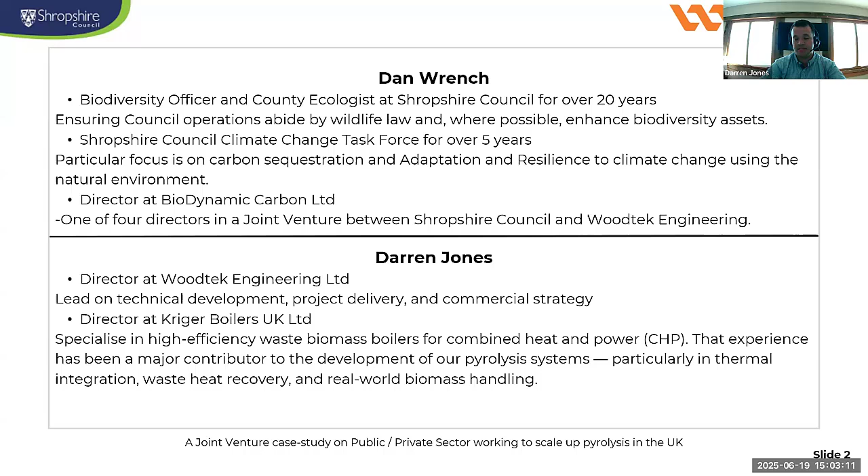Thank you. Yeah, Darren is definitely the expert in terms of biochar and pyrolysis. I come from a background in ecology, so I was a county ecologist for quite a while. I joined the climate change team in 2019. We started a climate change strategy, and my focus was on carbon sequestration.

So I looked at tree planting schemes, got several of those going, but soon found pyrolysis and was very interested in the prospects there. I started looking at various different options and technologies for pyrolysis and how it might apply to Shropshire Council. It took quite a while. We did have some useful contacts with the Energy and Bioproducts Research Institute at Aston University, but we were considering a wide range of technologies.

But in about 2021, maybe 2022, we found a neighbour, really, Woodtek, who are about 45 minutes away from where we're based at Shropshire Council. And we started discussions with them on how we might work with them.

We were still interested in looking at a wide range of technologies, and in 2023 we submitted a council paper for approval, and we were approved £2 million worth of funding to buy our own pyrolysis unit. We continued conversations with Woodtek, who were looking for capital funding to purchase their first own commercial model - they'd been using a pilot model up until that point. We set up this joint venture, which I'll go into more detail later, following another paper in April 2024.

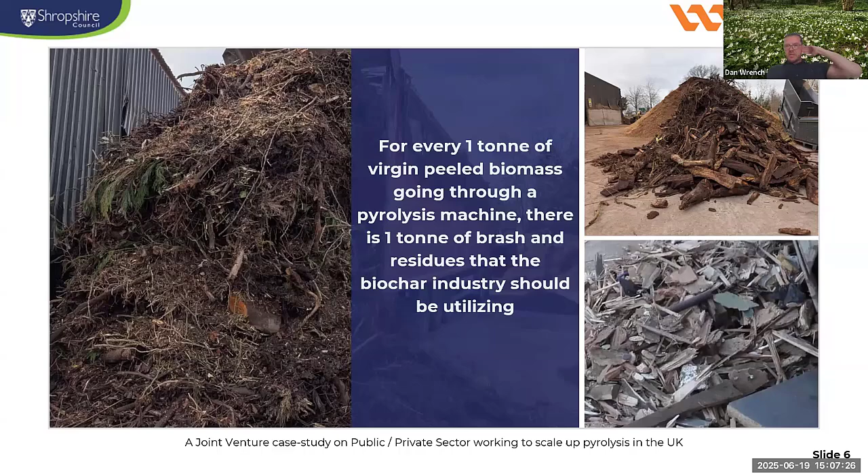So we were really keen on the Woodtek machine because that was designed really to accept a wide range of different feedstocks, and this is where the technical side of things Darren can explain in a bit more detail.

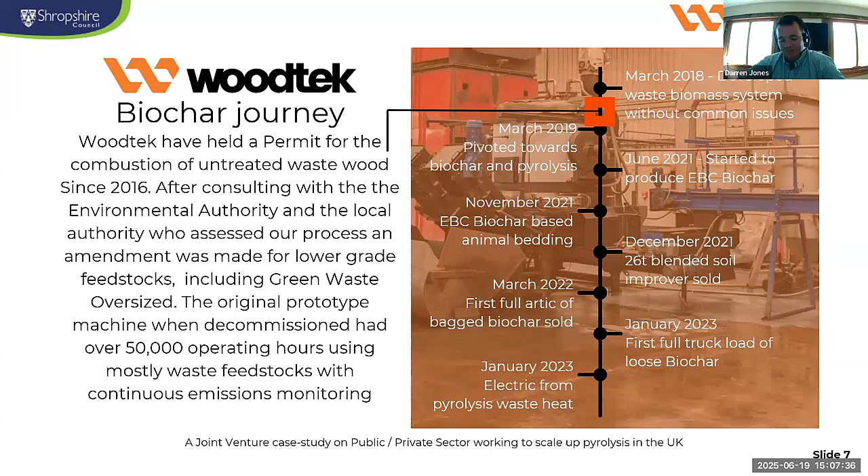I'm not going to waste my time with this audience and tell you what biochar is, because most of you guys can probably tell me more than I know about biochar. What I will say from our experience of predominantly dealing with waste and lower grade feedstocks is that the pyrolysis process is actually the easy part. The challenge is feedstock preparation, ensuring consistent quality into the machine. This is what ensures the biochar coming out is consistent quality and the emissions are correctly controlled and filtered where needed.

So our journey actually started back in March 2018, where we were developing biomass systems that did not have the common problems that the market technology had at the time - eliminating furnace hotspots, stopping it going over temperature, having emission issues, causing premature servicing shutdown, refractory failure, which becomes a lot of replacement parts and a lot of downtime and poor lifespan of the biomass systems.

We were also looking at trying to reduce the excessive downtime, any fouling, and being able to cope with change of feedstocks, and more importantly, having the machine look after itself where possible and built around planned preventive maintenance.

2019, after a successful test, we pivoted our focus towards biochar and developing pyrolysis. I think June 2021, our original prototype machine was consistently producing EBC grade biochar. Unfortunately, the market for raw biochar at the time in the UK was just non-existent.

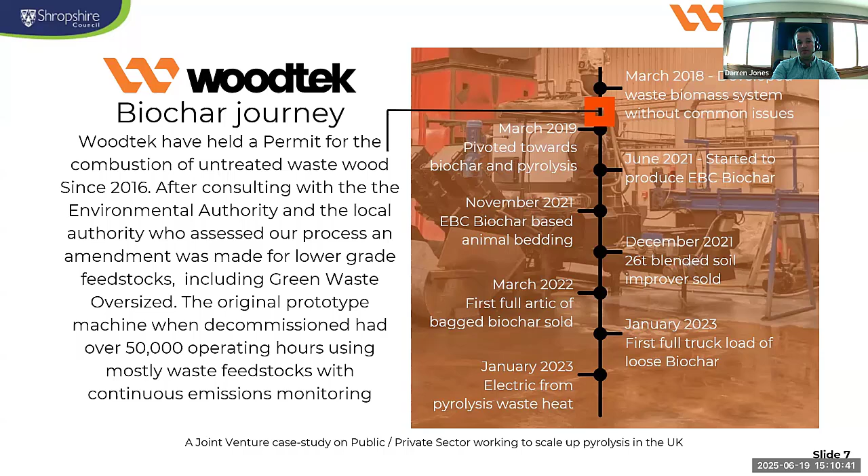Our prototype machine racked up over 50,000 hours between 2016 and 2024, proving its durability for lower grade biomass feedstocks. This, along with continuous emissions monitoring, was essential for the proof of concept on local authority green waste. This proving operation time with ultra low emissions, combined with our hands-on experience in biomass handling systems, gave Shropshire Council the confidence to partner with us and move forward with the biodynamic carbon joint venture.

We have over 150 biomass drying systems installed worldwide. They all have different feedstock handling systems, screening systems, feedstock storage, feedstock disposal. That's allowed Woodtek to quickly become one of the market-leading turnkey solutions in the biochar industry.

As I said earlier, the biochar, the pyrolysis, is the easy part. Feedstock preparation and emissions control require the most input of any early feasibility of a project.

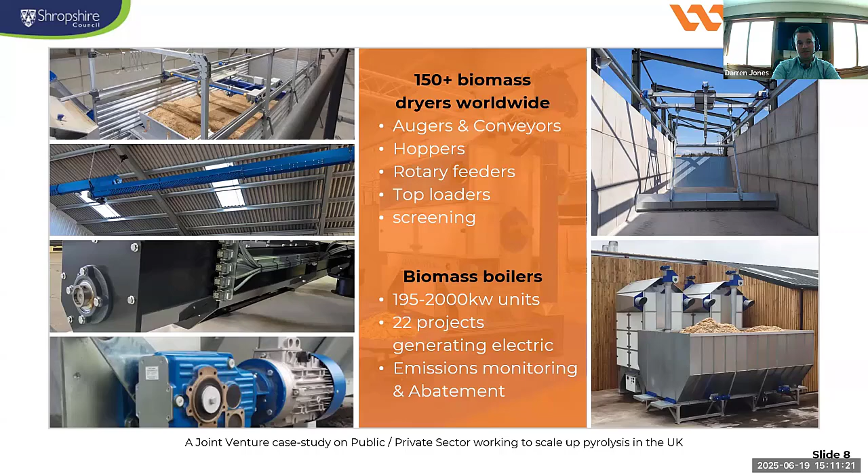So leaving the past behind, our old prototype machine, Betty, which I think some of you have met in person, has been decommissioned and now replaced with a full spec customer model. This is a C1000 unit where all of the thermal energy is used to dry feedstock, produce electricity, and produce heat for the industrial and domestic buildings on site.

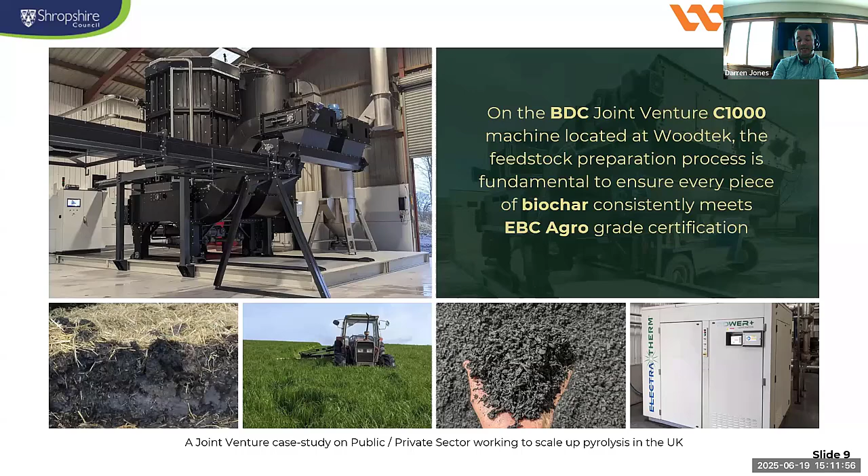When we're not carrying out feedstock trials, which we have done a lot of since the early stage of commissioning, we're producing up to 1,000 tons per year of EBC agro-grade biochar from whole tree biomass, or even EBC feed grade, feedstock dependent. The BDC joint venture aims to display best available technology in continuous pyrolysis.

So thermal energy available and combined heat and power. As I speak, today the plant is generating 62 kilowatts net of electricity, which is almost all of the requirement of our site here, including our factory, which is currently manufacturing C1000 machines, while supplying thermal energy to dry the feedstock. I think the waste heat out of the ORC is going into timber kiln drying.

Minimal operator input. So we trade on the Puro platform and EBC biochar. The auditing and paperwork side of that grows every year, so we've tried to put as much of that into the control system as possible, so the operator does not have to have so much input.

Low service and maintenance costs. The original concept of a secondary furnace and flue gas to water heat exchange was designed to have no hotspots or fly ash buildup. So although we originally said we should have 4 plant shutdowns per year, we're starting to find this could be reduced to 2. Low downtime for service with planned preventive maintenance.

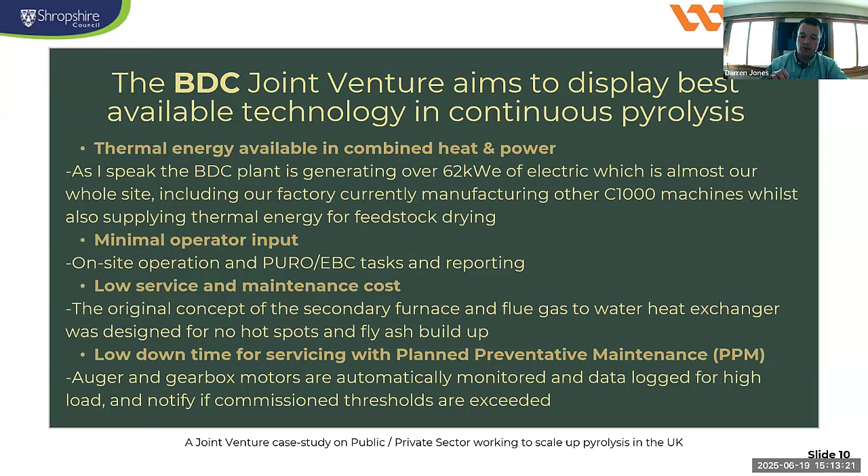All of our auger gearbox motors are automatically monitored, so the data is logged for high load and notifies if the commission thresholds are exceeded. This means if an auger is starting to wear down, we will know about it 6 months before it becomes a problem.

Low emissions. We have a wet flue gas scrubber, developed by Woodtek Engineering to operate with waste feedstocks. This was developed using composted tailings, green waste oversize, digested material. We've also had a continuous emissions monitoring system installed since day one. This was essential for Shropshire Council because they could see the emissions coming out of the waste feedstocks - very important for feedstock trials and due diligence for projects.

Easy to plan, permit and insure - very difficult. With the original machine, it was just insured and put in as a biomass boiler. As the biochar industry grows, so does the knowledge of pyrolysis plants and so on, so the BDC plant was specifically insured as a pyrolysis plant producing biochar. This helped create a bit of a roadmap for other people.

Having the full C1000 BDC plant at Woodtek Engineering has been a fantastic opportunity for Woodtek to develop our control system, especially for data logging feedstock and biochar, ensuring the carbon credit data is within a sort of black box system. This prevents misuse and increases transparency in the carbon industry.

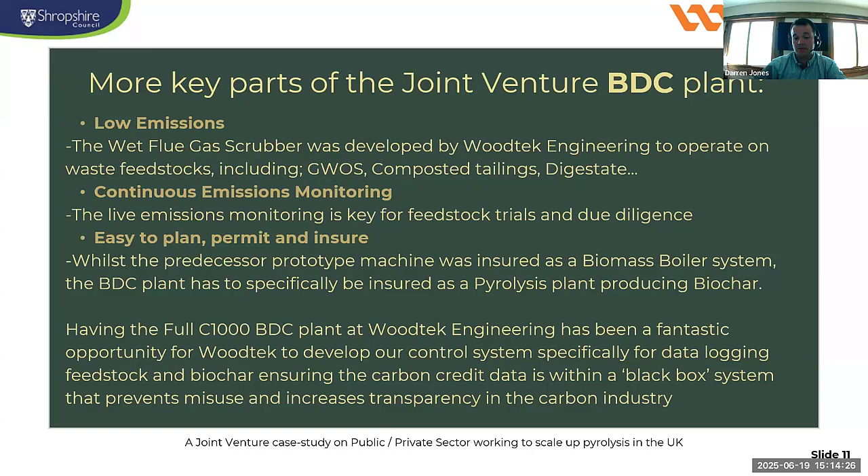So now I'll hand you back to Dan, who will start to talk his side of the joint venture.

Yeah, thanks Darren. So we started out with the idea that we would just buy our own pyrolysis unit - we'd go out and procure whatever's best for us. That's not without a huge amount of thought as to how we would run that, whether we have any expertise in pyrolysis, where we'd get the staff, and how long the maintenance contracts would last. All those sorts of things were something that we just thought, well, we'll tackle that as and when it happens.

So I think when the opportunity for joint venture came up, it was really about the de-risking side of things. So can we join with the manufacturer who's got a vested interest in keeping this going and making sure the production levels are high, and who knows how it operates inside out. That was, and also, of course, having been trading carbon credits and also selling biochar for the last 4 years or so - that was really one of the key factors for us.

It was quite a hard sell because their original prototype, Betty, was kind of cobbled together and it didn't look anywhere near as pretty as the new one. But it's the track record of actually producing this stuff and selling EBC quality biochar, and we'd seen the designs of the new unit.

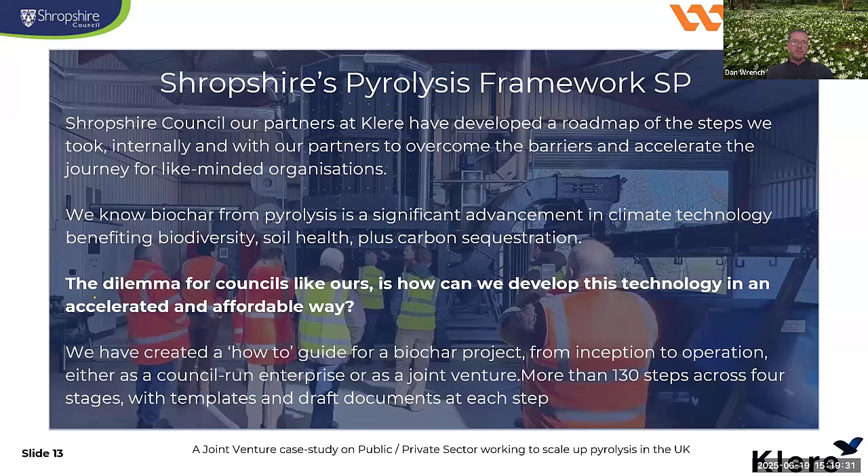This includes all the documentation required by local authorities to get to where we are. It includes an assessment of the feedstock availability of sites, a full assessment of all the sites available in that local authority, and also doing a lot of promotion around the various benefits of biochar and how the energy can be used in different ways within that authority area.

So we've looked at this - it's fairly vague but very indicative of the sort of savings we can demonstrate through using our framework. Going from concept and approval through to set up, delivery and operation, we believe we could save between 150 and 200,000 pounds net revenue, just because of the speed with which we can get through it, and we can avoid the barriers and hurdles that we experienced as we went through it.

Some of the revenue streams and benefits include the carbon credits. Initially, we're looking at selling those carbon credits so we can pay off the capital expenditure. But come 2030, we've got a carbon net zero target for the local authority, and we can use those carbon credits once the capital expenditure has been paid off. We will have 1.5, I suppose, operation units under Shropshire Council's ownership by then - half with the joint venture, of course, and our own in Ludlow in March, and maybe more by 2030.

We can use locally sourced feedstocks - there's plenty available when we want to develop the networks further. We get revenue from the energy, from the biochar sales, and we're also creating more resilient ecosystems and improving the natural capital. We've got real issues with pollution of rivers in our area, and we're really looking into the opportunities and research into preventing nutrients and other pollutants from reaching our rivers.

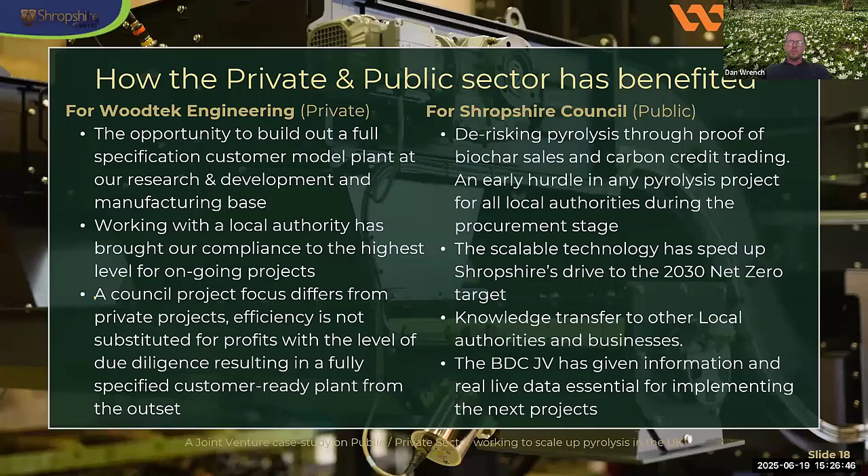From Shropshire Council's point of view, we are de-risking our first venture into pyrolysis. We saw the potential of pyrolysis, but we didn't really know anything about it. Having partnered with Woodtek, we've got the biochar sales and carbon credit trading experience that they've got, and they also helped with the procurement stage, which we definitely wouldn't have been able to do without Woodtek's support in a very detailed way.

We've also realized this is a scalable technology. We can offset our net emissions already with just over one of these units, and our net emissions at the moment are about 2,500 tons, so it's not far off. With 2, 3, or 4 units, we can make an even bigger dent in those emissions.

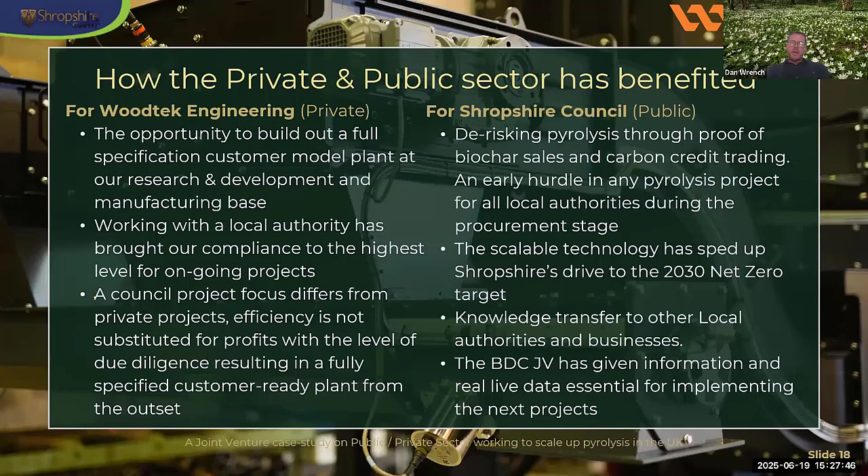The knowledge transfer has also been really useful. A lot of other local authorities are keen on the joint venture model. Having seen the opportunities of de-risking this, they are considering it, and that's one of the options we present to them, that they can join a joint venture with BDC. There are also private sector interests who are interested in that angle.

We've also got Enviro Consult, who have been fantastic in terms of planning and permitting. We've got Atwood Planning there, and Anthony Collins solicitors for the legal aspects. It's a great team, and we want to keep that together with our Shropshire pyrolysis framework. Anyone who's interested, do get in touch.